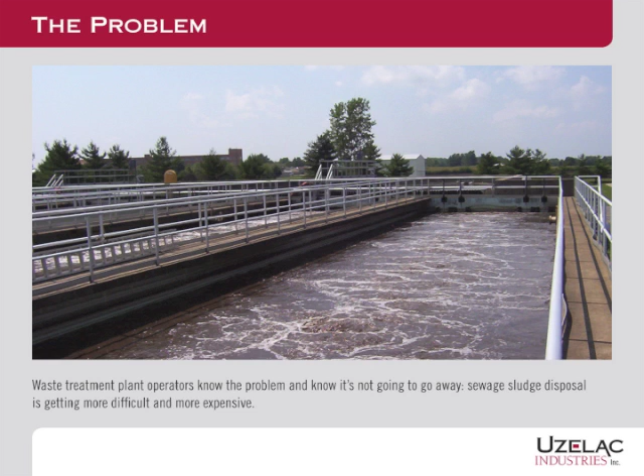Our customers include companies such as Tyson, Cargill, and General Atomics. They all can attest to our core values of integrity, customer satisfaction, and innovation. Need for innovation. That is exactly what brought us to the problem each waste treatment plant operator is experiencing, and is not going away: disposal of the sewage sludge. This problem repeats itself daily, and the management of the problem continues to get more difficult and more expensive.

There are 3 choices that WWTP operators have: agricultural land application, landfilling, incineration. Each one of these methods faces ongoing challenges in addition to a large carbon footprint. Land application is the most common of all management methods. Approximately 45% of all biosolids are managed by this method. The sensitivity of the public and media to land application means allegations to public health and environmental impacts from biosolids, while not necessarily accurate, will be routinely addressed.

Approximately 28% of biosolids are disposed of in municipal solid waste landfills. Landfilling is an option in many areas of the country where hauling and tipping fees are low, or where it is the only management option currently available to a public agency. Landfills have a finite capacity, and siting new landfills can be a very difficult and expensive process.

Incinerators manage approximately 17% of biosolids. Generally, incineration has been demonstrated to result in an 80 to 95% reduction in volume, the effective destruction of pathogens, the degradation of organic compounds, and the production of a sanitary, odorless, non-hazardous byproduct, ash. Challenges encountered when choosing the incineration option involve negative public perception, fuel prices, and capital equipment costs. Although this method may be the most effective, it is the most controversial. There simply needs to be a better alternative.

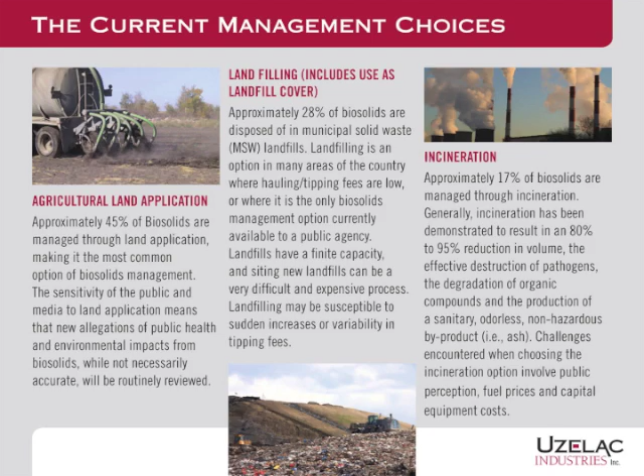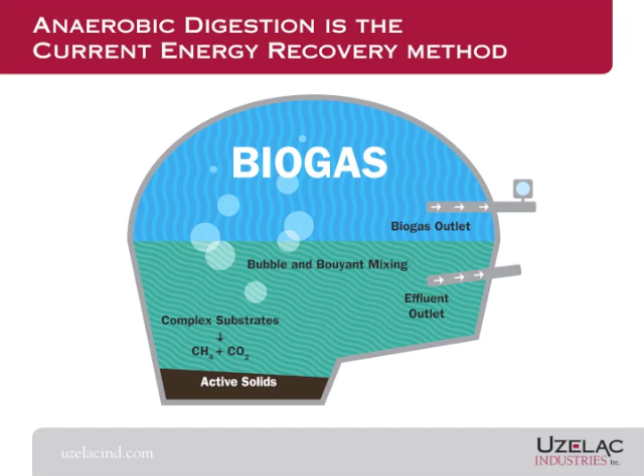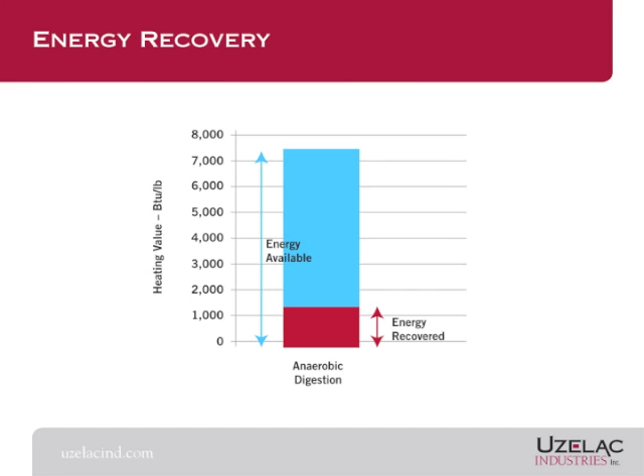Anaerobic digestion is the present method for recovering energy. Anaerobic digesters are expensive to build and operate, and only recover a portion of the energy that is available in the biosolids. What if you could recover all of the energy available? We know that the digestion method only recovers slightly more than 1,000 BTUs of heating value. There are over 7,000 BTUs available in biosolids.

Innovation equals solutions. Uzelac Industries has engineered a process utilizing long-existing technologies that will be a more cost-effective, better alternative to the incineration systems currently operating, while greatly reducing the carbon footprint. And while accomplishing green initiatives, we do so at a fraction of the CapEx cost, virtually taking daily operating costs out completely. We would like to introduce the next best alternative to biosolids management, the Uzelac BMS system.

Here's how it works. Wet sludge, containing 25% solids or more, is fed into the drying system after mixing recycled dry product. The sludge moves through the system, where the moisture is removed. At the end of the dryer, the dried biosolids will be 90% solids, thus creating a fuel very similar to the BTU value of lignite coal. The dried fuel is then conveyed back to a stoker burner, where it is completely combusted. The heat that is generated is fed back into the dryer to continue producing fuel.

In this process, a portion of the dry fuel is also mixed with the wet sludge to prevent binding of the wet sludge. Exhaust gases from the dryer are cleaned using state-of-the-art air control equipment, leaving a clean gas stream that meets all applicable EPA standards.

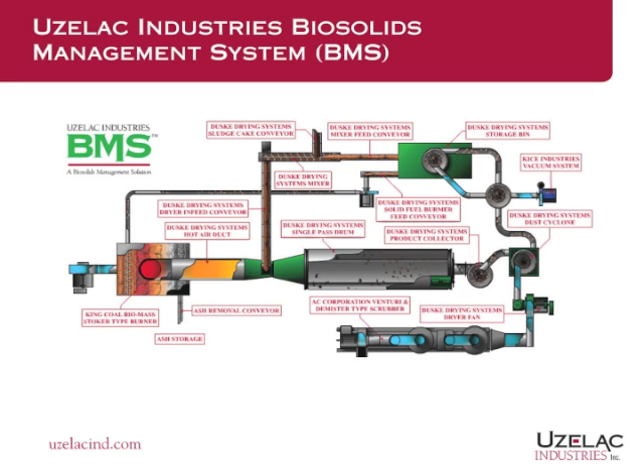The BMS has major advantages over all of the present methods of biosolids management. Comparatively low capital investment, many times less than 25% of the cost of sewage sludge incinerators. Greatly reduced ongoing operating costs. Fossil fuel costs are virtually eliminated. All based on proven technologies. Each technology incorporated into the design has been successfully employed for decades in other applications.

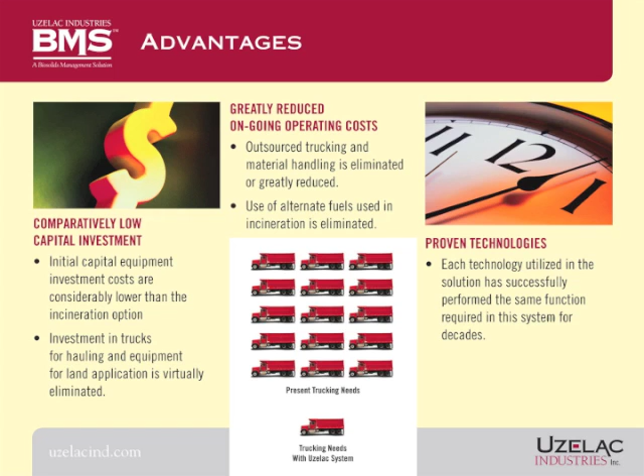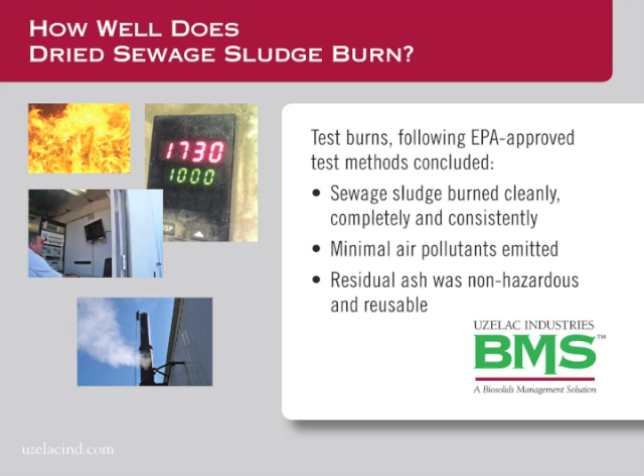So, how well does dried sewage sludge burn? In short, very well. Test burns following EPA-approved test methods concluded that sewage sludge burns cleanly, completely, and consistently. It emits minimal air pollutants, and the residual ash was non-hazardous and reusable. Let's once again review the energy that is being recovered with anaerobic digestion and what is available. The Uzelac BMS system will completely and effectively recover 100% of the available energy. What other green initiative can you think of that can be this effective?

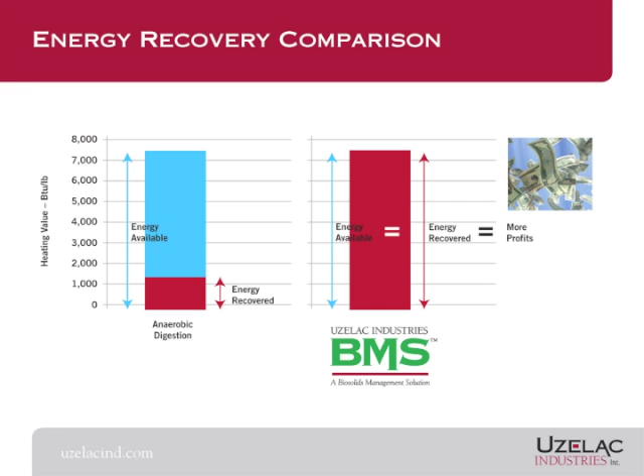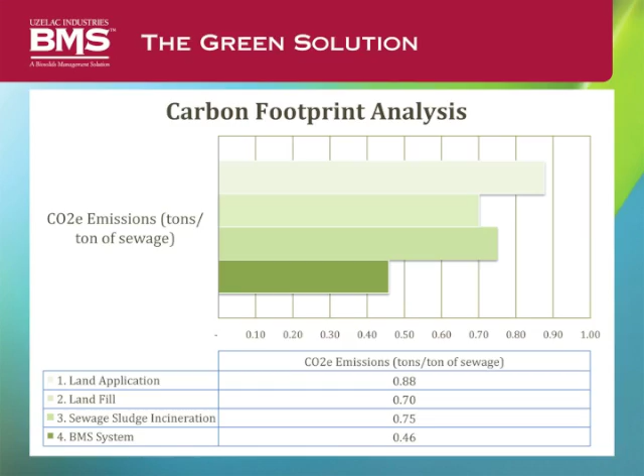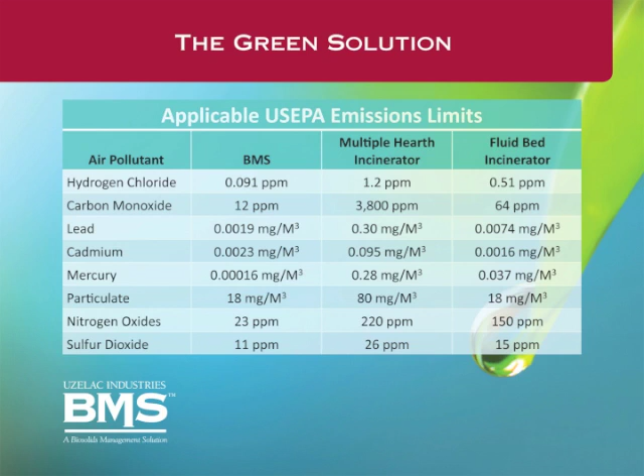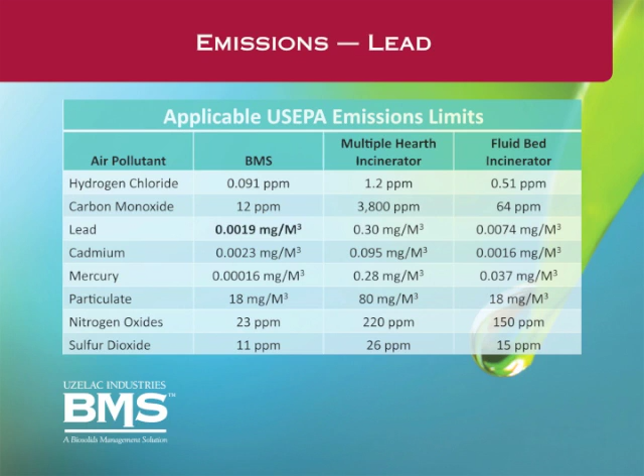The Uzelac BMS system either meets or exceeds EPA regulations. Because the BMS system is not classified as a sewage sludge incinerator, the system meets the much more stringent CISWI rules. As a CISWI unit, the BMS system emits far less air pollution than sewage sludge incinerators are allowed to emit. It is truly a green solution. Pollutants like hydrogen chloride, lead, mercury.

As you consider the right choice for your biosolids management, remember the BMS system has a lower capital cost. It virtually eliminates fossil fuel usage. It has a small requirement for ongoing operational costs. It has the lowest carbon footprint of all management methods. It conserves our future with a green solution with an effective ROI. It is the best choice for your biosolids management.